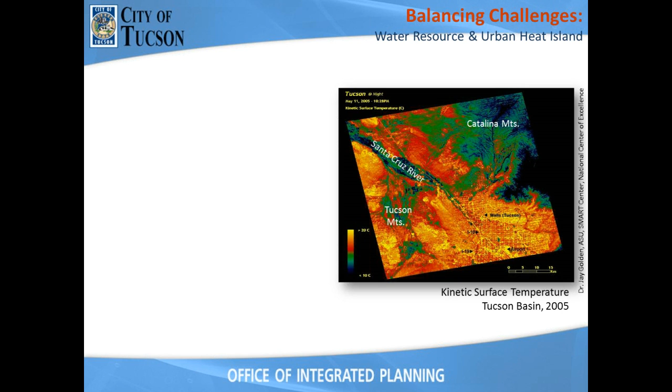So a little bit about the climate change aspects. For me, my background also is in medicine. I'm a nurse, so urban heat islands has been a very important part of urban development for me. So we know that heat in our cities is increasing because we have more impervious surfaces. And what the climate change researchers and scientists are saying is that heat and drought are the number one natural causes of death in our community. And Arizona has the highest of all in the United States.

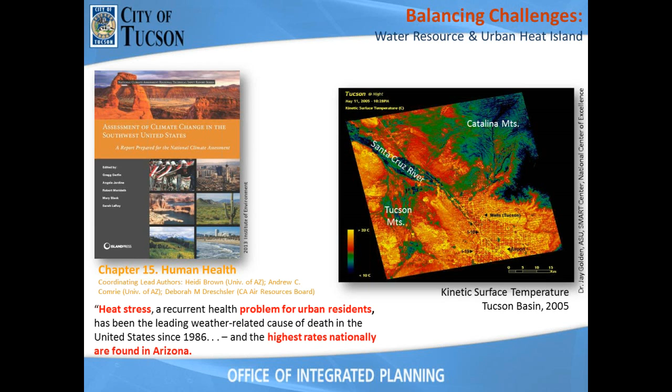So what they're also saying is, okay, we're getting hotter, our precipitation is getting less, but when we have storm events, they're getting more severe. But we can do something about it, and that something is, as we've mentioned before, planting trees. A hydrologist and a scientist at the U of A says trees are the best movers of water. As Brad indicated, the roots suck up the water and the leaves transpire and let the water out, so they're one of the best movers of water. So when we talk about green infrastructure, we want to make sure we have these trees because they're going to help us cool the environment, but they're also going to help us move that water.

So from the regulatory side, Tucson Water, City of Tucson has the water utility, and we're talking about 2 buckets of water. The first bucket is the groundwater, which we know we have already started depleting. We're already in fossil water. The second one is surface water. And even as Brad said, for us, it's the Colorado River.

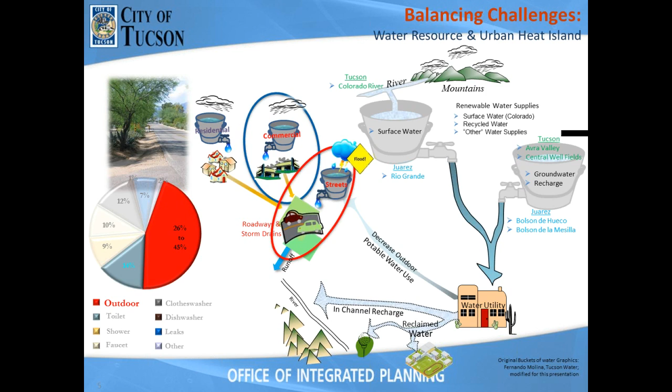All right, so in terms of streets, what are we doing? Well, we know about stormwater management, and Doug talked about that, and the EPA, and how water is necessary, or trying to control that stormwater.

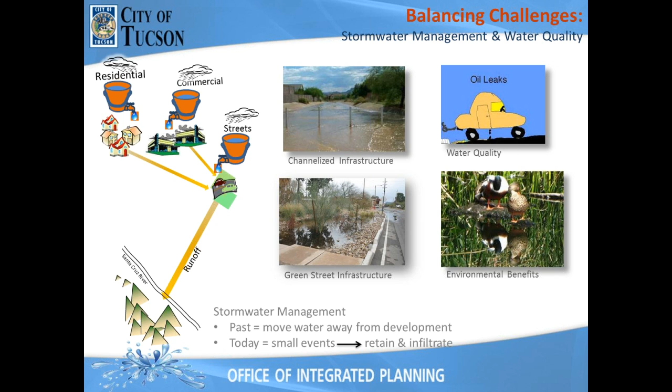Not only for pollution and water quality, but also how to keep our environments healthy. So what we're trying to do is move from that first picture in the upper left hand, which was the channelized infrastructure, to what Doug even talked about. I think his example was the LA channelized river, moving from that channelization to more green. In that way, if we think about the trees being movers of water, the roots suck up the water, and then it moves out through its leaves. But it also helps to make the environment healthier, and in particular, our urban environment.

So when we start talking about regulations, I'll get into that part now that nobody really wants to think about, but from us on a public side, there are certain regulatory mandates that we have to look at. We've sort of moved from guidelines, that's policy level, to regulations, which is code, but then compliance, how to police all of that. And that can be a burden for the city if the inspectors aren't out there.

So in the city of Tucson, a lot of our compliance side becomes what we call complaint driven. If somebody complains about it, the inspectors go out and look at it. If they don't complain about it, such as when Brad did his illegal curb cutting, if nobody complains about it, we're not going to go out there and look at it.

All right, so let's see, we're starting to talk about, okay, in the beginning, Tucson was pretty far ahead. I think that the landscape architect in the transportation department was forward thinking. So even back in the late 1900s, 1998, he was already practicing some green infrastructure.

Okay, so as Brad said, it was still illegal to cut the curbs. Now the curbs are public property, so he wasn't cutting curbs, but he was collecting rainwater on site already. And so that was some of the movement. He was trying to get the engineers to do the curb cuts, but they weren't listening. You know, the engineers don't want to hear about it. They're thinking that it's going to undermine the pavement. It's going to do all the bad things, and they're going to have to do more repairs.

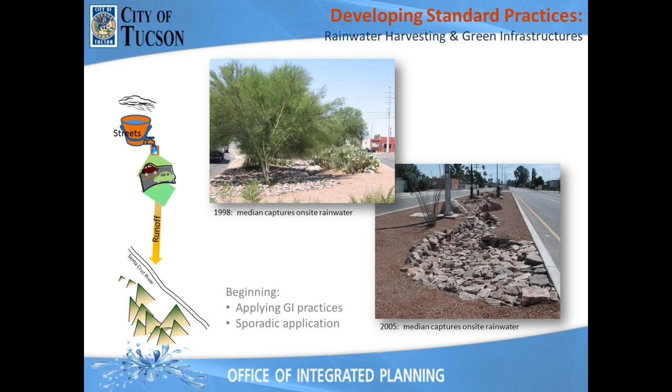So then Brad came along. He did his illegal cut. I came along, I joined the city. So now there were two landscape architects arguing for the curb cuts. But the engineers are still like, no, no, no, we don't want to hear anything.

So then it was like, okay, what would it take to make you guys approve curb cuts? And they said, tell us who else is doing it. What other engineers are okaying this? So it's like, okay, so I sent them some contacts from Portland, and Portland rains more, and they were already doing it. And then after a week, they said, okay, we'll approve these curb cuts. So now on the city's web page, we have standards listed, and anybody can do it. If you want a permit, you can get a permit. You have to go through a process, but now it's legal.

So that first lesson is engineers talk to engineers. So if you guys are engineers out there and you believe it, talk to your coworkers. If you are not engineers, find an engineer who believes in it and talk to them and convince them to do it.

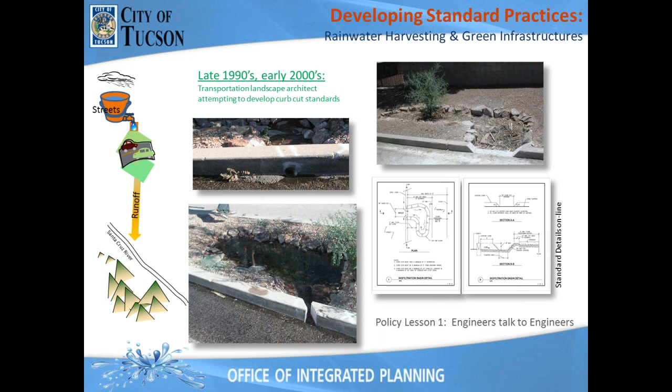All right, so now the city, it's become legal even for the city. So the city transportation department did several projects on their own with these curb cuts. It wasn't mandated yet, but they were starting to do it. So we have several projects in the city that started to use these curb cuts, and they're working, as Brad even showed you.

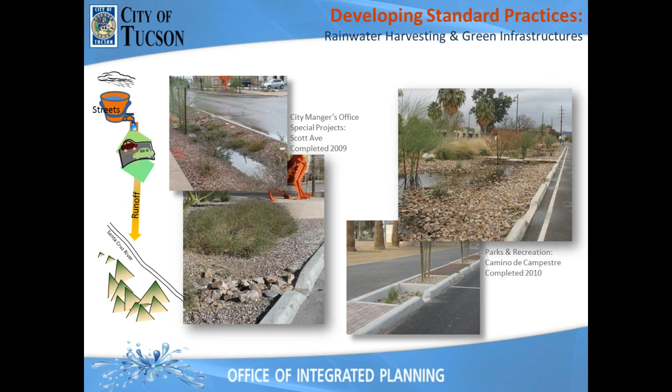All right, so the second ordinance, the second piece, the ordinance that came into play was the rainwater harvesting ordinance. And we thought, oh, there's no way we're going to get a rainwater harvesting ordinance passed. But there was a champion on the city council, and he was listening to his constituents, and his constituents were saying, we think this is an important thing for the community, so you have to do a rainwater harvesting ordinance.

The developers weren't on board yet, but the community was definitely on board. So how did we do it? Well, you have to consider all of the stakeholders. There were multiple stakeholders: the developers, the plumbers, realtors, the people who were selling property. They were all the people we needed to consider.

There were actually three things this council member wanted to happen. One was that all new residential homes get plumbed for gray water use. As Brad was saying, things from your sink, your shower, your washer can feed water into your yard. So he wanted not that all residential had to use it, but that the plumbing had to be capable of switching the gray water on.

The second one was that all residential homes had to be set up so that it could have solar hot water. It's not that the homes needed to have that solar power, but just that if the resident, the homeowner, wanted to hook up to solar power, they could plug in.

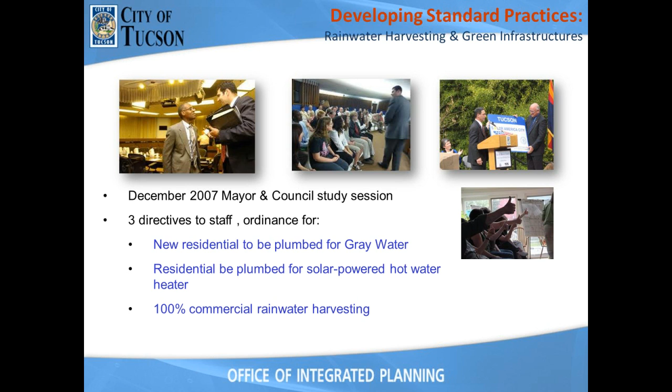So how did we do that? One is mayor and council appointed a multi-diverse group of people to help craft the ordinance itself. So what we have in Tucson is a very strong community-powered people. So it was important for mayor and council that they had a diverse group to help craft this ordinance. So there were developers, realtors, people from the professional trade, and the nonprofits.

The second thing that the staff thought was very important was there had to be some kind of development standards, so that when a plan came in for review, the person submitting it would understand what they needed to submit in order to get their plan for development approved. So the second committee that was formed, mostly put together by staff, was the technical side. How do we do this water harvesting? This was composed of people from the architects, the landscape architects, the university researchers.

I think Brad was on that committee. And then also various divisions of the city: the planning and development services department, the Office of Conservation and Sustainable Development — we are now called the Office of Integrated Planning. Tucson Water was involved, as well as the Transportation Department and Parks and Rec.

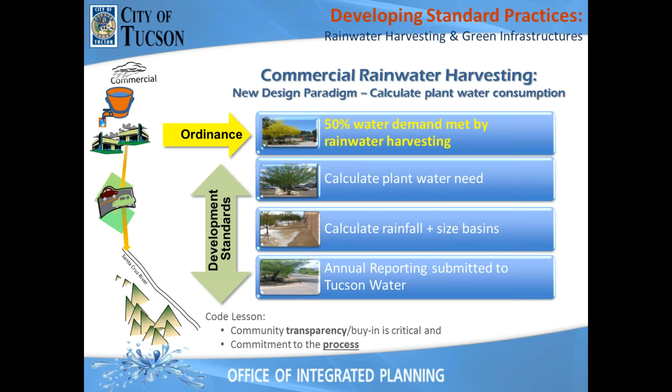So let's talk a little bit now about the green infrastructure policy that we have in place. In the beginning, the City of Tucson has been quite ahead. Tucson Water has been very proactive in conservation, so they already had manuals in place for rainwater harvesting.

We'll help you find some money to put it together. And if there's enough volunteers to also work on it, we'll help implement that. And watershed management also worked with the city, and they wanted to move one step forward to make it even better. So instead of just communities and neighborhoods asking voluntarily for this kind of green infrastructure, they were pushing for it to become mandatory that all streets the city started to look at would incorporate some kind of green infrastructure. So this is not an ordinance.

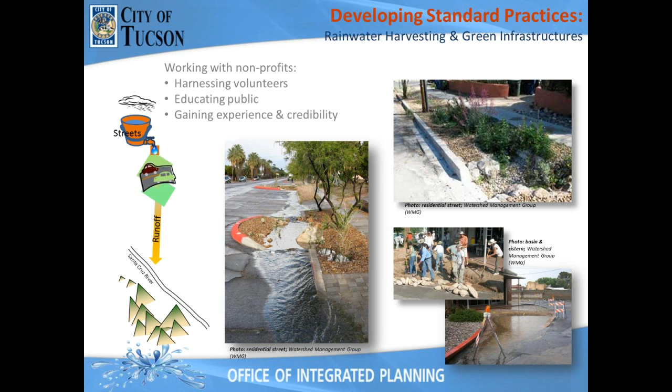It's what we call a policy in the Department of Transportation, an active practice guidelines. So what they started to do was work with the city, work with a group of people, and last year the Transportation Department accepted this as a policy, and all consultants who work on any city roadway projects are given these active practice guidelines. There's more than green streets, but they're giving all of it.

So I think one of the true tests that happened was there was a street design under construction. It was a redesign of a street, and 60% of that design was already completed. And this policy got accepted by transportation. Those engineers went back to the drawing board and they put in green infrastructure, and now they're 100% complete, and there is green infrastructure in that design.

So the little drawing at the bottom is one of their drawings on how they incorporated that green infrastructure into their construction drawings. So it's not an easy task.

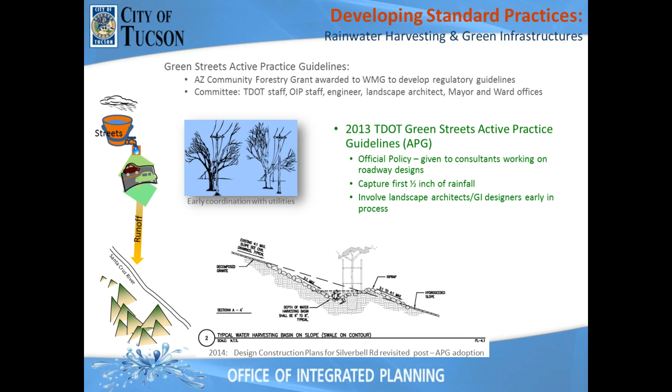So the lessons learned here is there is a paradigm shift. There is a ground swelling from the bottom up. There is a way that EPA is now starting to look at how we manage stormwater, and there is a way that the city is also saying, hey, we have this urban heat island, we have to mitigate it, we wanted to make it more livable for people, and the best way to do that is trees and shade, getting people out there, as Brad said, get to know your neighbors, get to know your businesses.

It's good for economics, but it takes a whole community to push it forward. So not only watershed management, we have another nonprofit called Trees for Tucson, Tucson Clean and Beautiful. They also pushed for it. There were consultants like Wheat Scharf, which is a landscape architecture firm, Stantec, an engineering company, and also our regional government, the Pima Association of Governments, as well as the Pima County Flood Control. We're starting to work with all of them. We're all starting to get on the same page, or trying.

So the 3 buckets of water, at least the City of Tucson has: we are covering streets now, we're covering commercial development, and we cover residential. So we're trying to hit those smaller buckets of water so we don't have to dip into the bigger buckets of water, and we can reserve those for other needs.

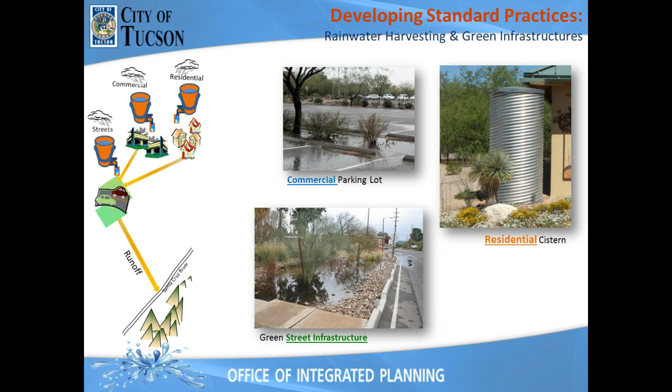All right, so just a little, I think Doug covered also how EPA is moving forward. We've been recognized by EPA, Pima County, for our green infrastructure programs. So I think that's the end.

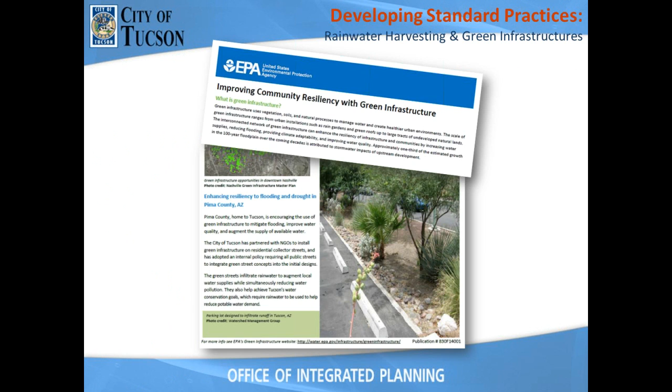Here's some resources here. But I also want to mention another piece that will be spoken tomorrow, about the cost-benefit analysis. So both Brad and Sam talked a little bit about the quantitative analysis they've been doing in terms of how much water they've been able to capture and save. I think the next piece for us is that cost-benefit analysis.

The City of Tucson just finished a report. It's online also under Pima County's Regional Flood Control District, and it was a cost-benefit analysis, and it really excited me from the public sector, because when it looks at the pie chart of who benefits from green infrastructure, over 50% of the beneficial party, stakeholders, is the government and the community. And the smallest piece is really the user. So in terms of streets, that means the driver of the vehicle is a small beneficiary, but the rest of the community is a big beneficiary of the green infrastructure.

That's it. Thank you.